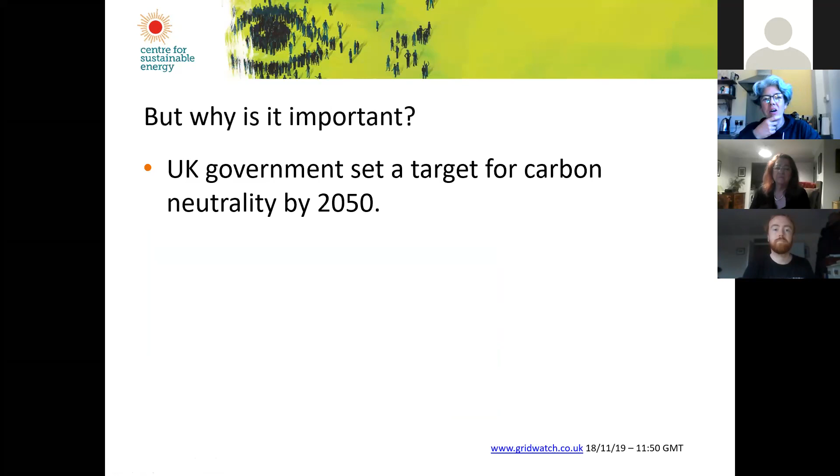Next slide, please. So we've got a target for carbon neutrality by 2050. That's a good target, whether we get there, don't know. But in order to achieve that, we do need to move all our heat demand to be carbon-free or electric. And I think the only way we're going to do that is by moving to renewables.

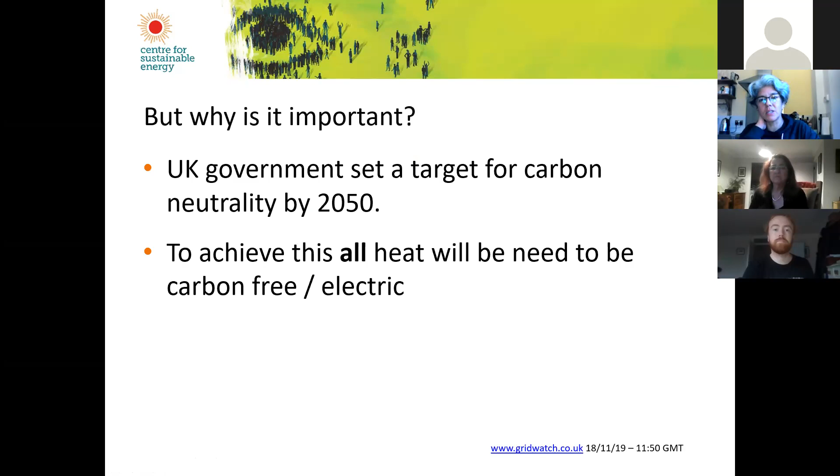Next slide. So this was taken back in August. It's from a lovely website called GridWatch. If you can't see it, I'm sorry, but it might be worth having a look on the website afterwards. It updates itself every 10 to 15 minutes, and you can see what percentage of the country's energy is being produced by different sources - solar, nuclear, coal, gas, that's the CCGT. It's a really interesting website to look at. On that day, something around 15 gigawatts was gas, about 2 gigawatts biomass, nuclear was 5 gigawatts. I can't read all of it here, but the demand was about 30 gigawatts, I think - it's very small for me to read. But it's a good place to see what our demand is. And if you look down the middle row at the beginning, there's wind and solar, and actually they were a rather small amount being produced that day.

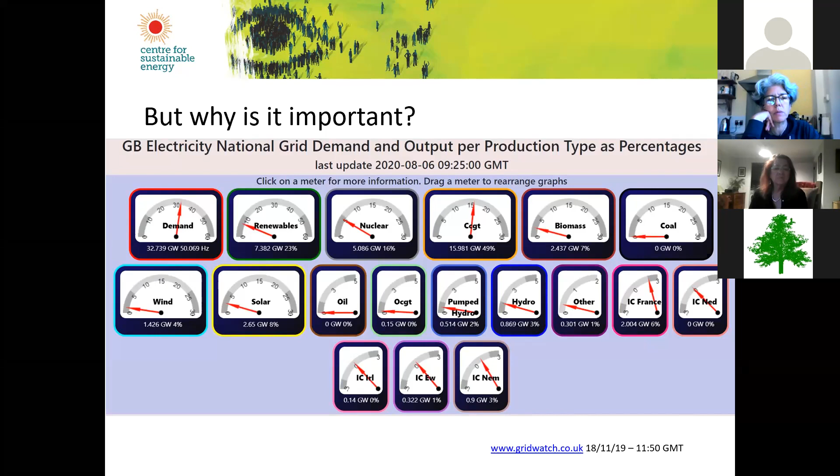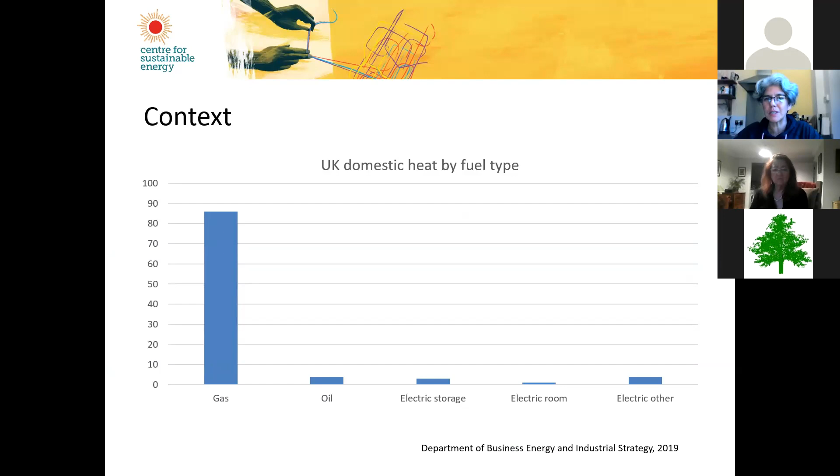Next slide. And this is important because nearly 90% of houses in the UK are heated by gas. So if we want to go electric, we've got to get pretty much 90% of people off of gas and heating their homes through electric. As you can see, probably less than 10% of homes in the UK are heated with electric at the moment, so it's quite a big task. But we did go from pretty much coal to gas during the course of the 50s, 60s, 70s, so it is possible if we want to.

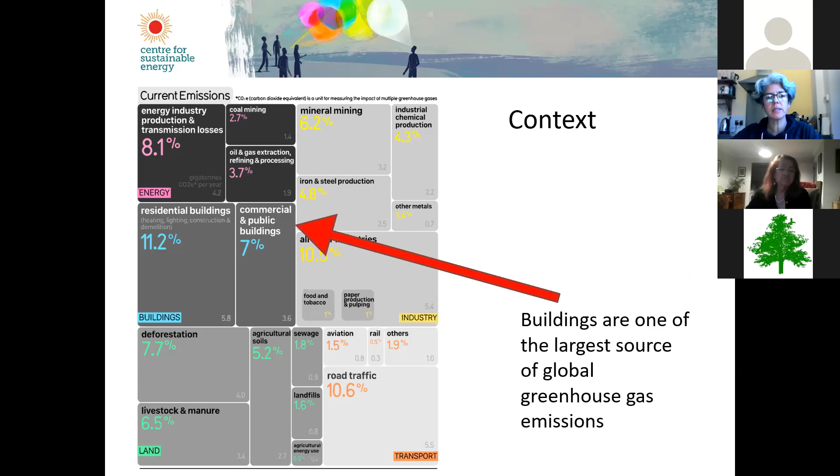Next slide, please. This is a nice little illustration from Europe, so it's not 100% accurate, but it's not far off. 64% of energy consumed in a household is for heating - it's slightly more in the UK, around 65 to 67%. Then 14.8% is water heating, normally averaging around 20 to 25% in the UK. The rest is cooking, lighting and other appliances. So at the moment, because most of us heat our water with gas and heat our homes with gas, the electrical load is actually very low. So if we're going to transfer all of that heat load onto electric, we've got quite a mammoth task, if you look at your individual home and then across the number of homes in the UK.

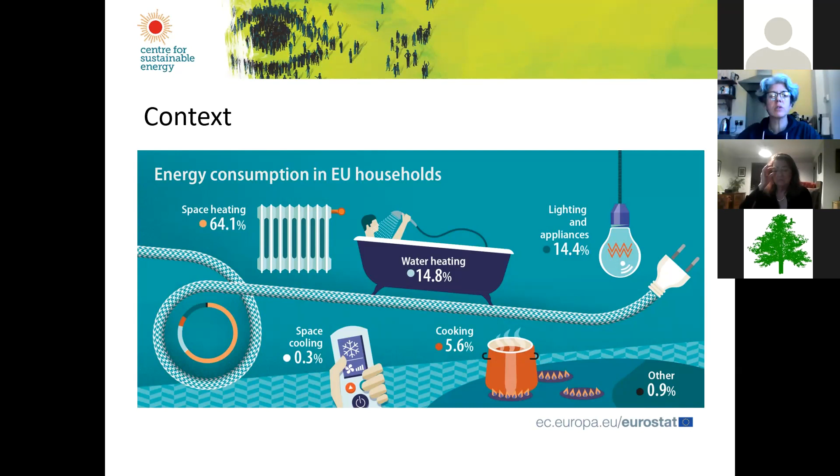Next slide, please. So if we go to retrofit - most people want to reduce their energy bills, we don't like paying through the nose for our energy, anybody. We don't actually like living in cold homes, although I suspect a lot of people have fairly cold homes - I know I do, I wouldn't mind a warmer home. And 17% of the people asked in this particular survey, I think it was a BEIS survey, ranked it as most important.

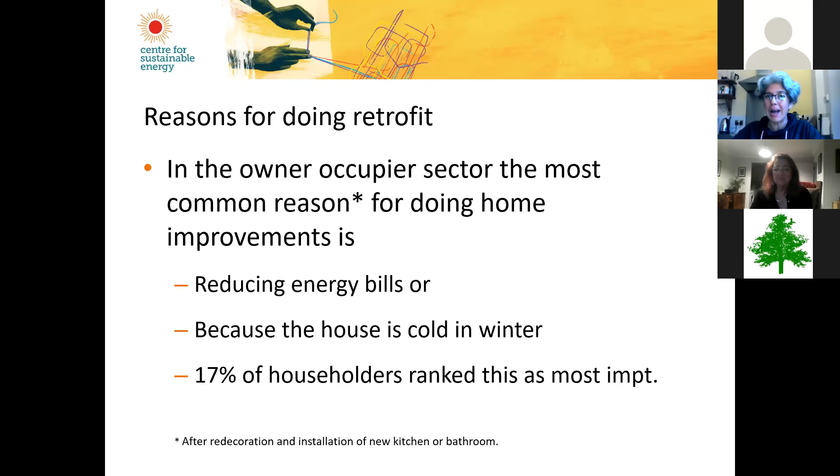But that was only after people had redecorated their house, put a new kitchen and bathroom in. So it is something people want to do, but we'd like to have a nice home, a nice kitchen and bathroom, before we worry about how energy efficient it is. So we kind of do things the wrong way around.

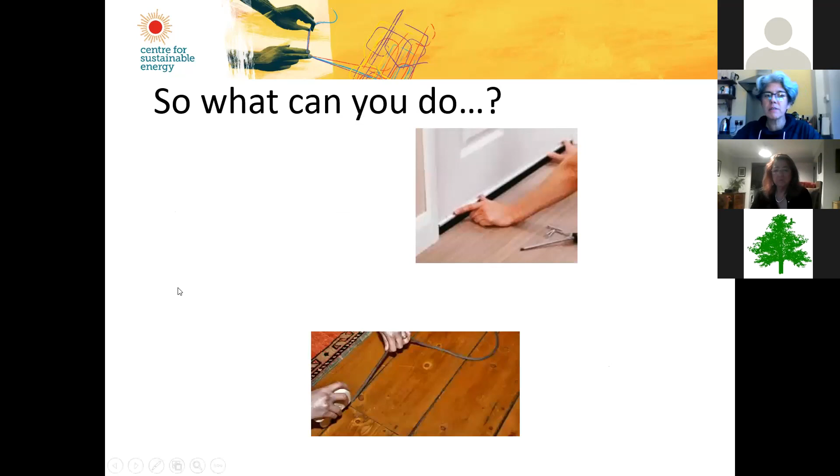So I was asked about what you can do, and this is literally a slide of different pictures of what we can do. So this is draught proofing, simple draught proofing, things like in between your wooden floorboards. I've done it in my home and it's made a massive difference. Internal wall insulation, external wall insulation, much bigger jobs.

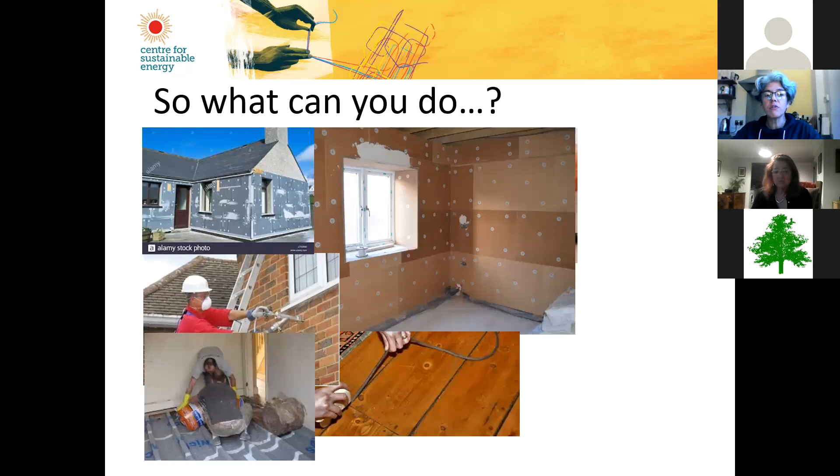And that's cavity wall insulation being installed. And again, this is underfloor insulation being put in on a raised timber floor. Loft insulation, double, triple glazing.

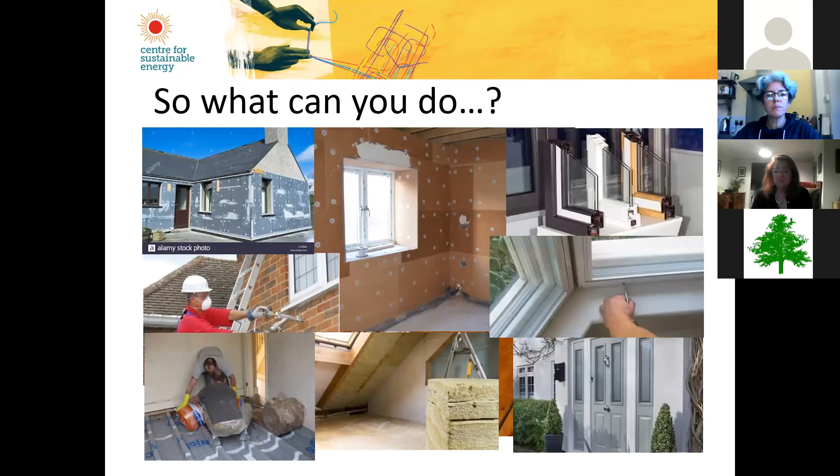This is secondary glazing, composite and very high energy doors. Are there any more? Yes, solar PV, solar thermal, heat pumps. That's an MVHR unit, that's a ventilation unit. Are there any more? Ventilation, yeah.

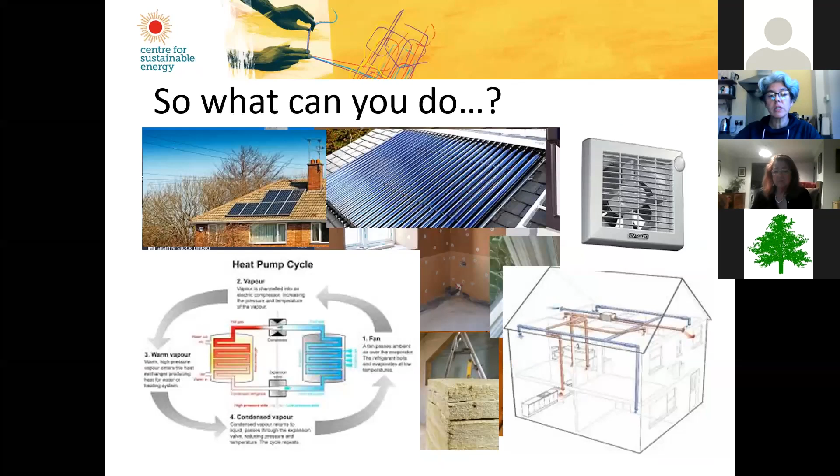Just going through the process, I actually started that slide with looking at the cheapest, easiest measures you can do in your home, building up to some of the more expensive. Now, I wouldn't suggest you put an MVHR unit in last—if you're going to do a retrofit, you probably need to put it in earlier in the process. But you can start with some really simple things that can be really effective, and then, of course, you can start spending a lot of money.

It can be shutting the curtains in the winter when it gets dark, which helps keep the cold outside and the heat in, and helps with convection currents. Nobody really explains the reasons behind that—it just says shut your curtains—but having thick curtains and doing that in winter can really make a difference. It's also about shutting doors when you're in the kitchen and you don't want that hot air going around different parts of the house and potentially causing condensation problems.

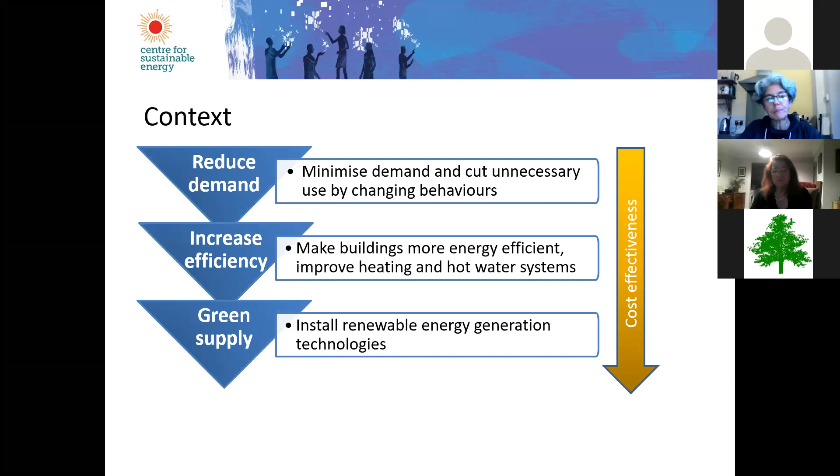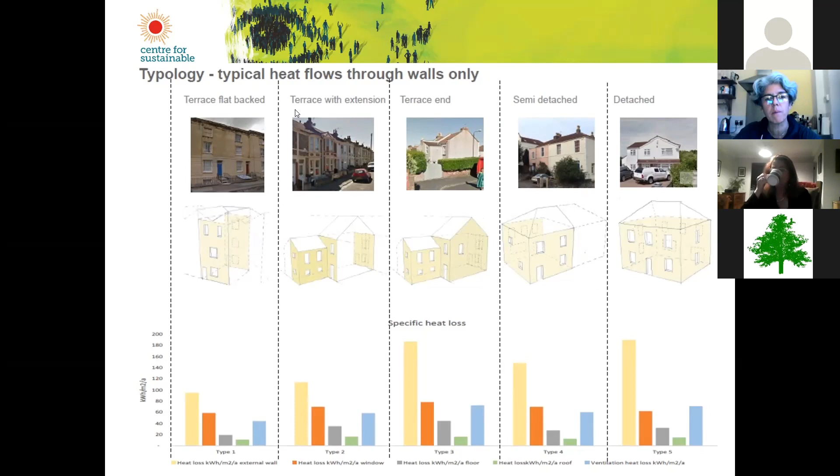So I was asked to talk a little bit about Future-Proof - that's the title I've got tonight. It's a project I've been running for the last 18 months, run by the Centre for Sustainable Energy in conjunction with our partners, the Green Register. It's funded by the Department of Business, Energy and Industrial Strategy, and it's a pilot looking at how we can grow the supply chain - to you and I, that's builders and people that do work on our homes.

So we've got a sort of twin-facing project. We're running an advice side for people that want to understand how they can make their homes more energy efficient and get some tailored advice. And we're also working with builders to try and get them to do more training and understand the principles of whole house retrofit and some basic building principles, so they can understand better how to do the role that they're doing. Next slide, please.

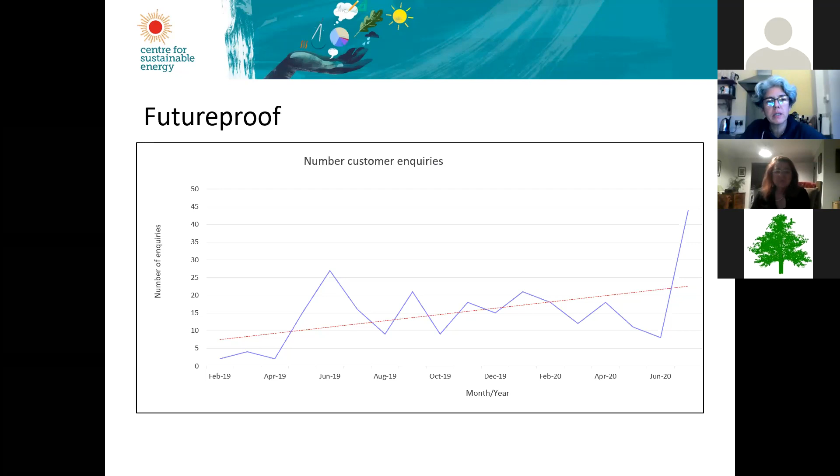So next slide, please. As I said, the other side of the work we do is working with what BEIS likes to call the RMI sector, which is the repair, maintenance and improvement sector - again, builders. And we have a bit of an issue with builders in the sector, because most of the builders that will work on your home don't realise that they are potentially at the front of the energy retrofit revolution.

So the guy that comes around to fit your kitchen, he probably is not going to try and sell you insulation and improvements while he's doing the works. Likewise for the person that's going to do your bathroom, or maybe the decorator, all of that stuff. So within the industry, we have suppliers of certain products like heat pumps, solar PV, glazing, doors, that sort of thing. And when you want to do that on your own and just do it as an improvement, that can work.

But if you really want to improve your house further and reduce the carbon emissions, you really need to start looking at that kind of whole house approach and how you can really make an impact.

When you want to do an extension or a loft extension, what happens is you come across a lot of builders that don't really know how to do that for you. There's a very small niche market of builders that operate in this particular arena, and we've been working with them to develop some training, trying to expand the number of builders we're working with. You've got all the skills because you're a builder and know what you're doing, but you don't really understand the building physics stuff. If we can teach you this, and the importance of making sure you don't get thermal bridges, you've got good air tightness, and you know about ventilation, then you're not going to have any problems on the job.

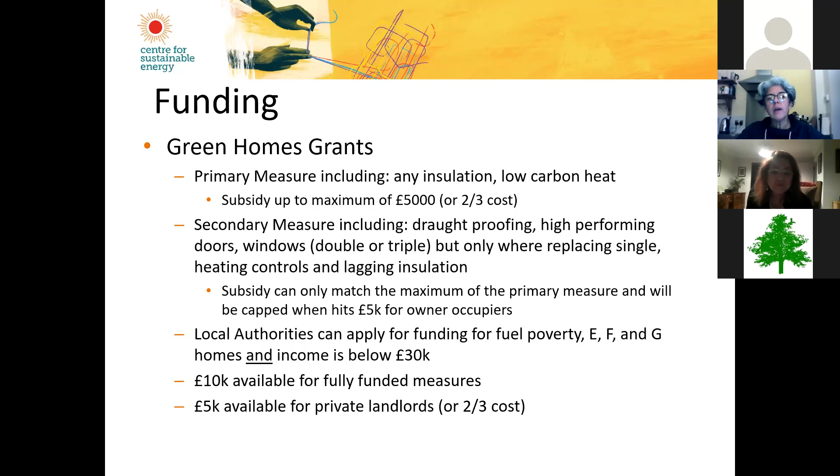But everything needs to be fully funded for the £10,000. You can't give money towards that. So if you did know somebody you thought might qualify for it, and they wanted a heat pump, that £10,000 would need to pay for the whole of the heat pump. They can't invest any of their own money in it.

Private landlords can apply for up to £5,000 to help them through the process, though I think it may only be available on 1 or 2 properties. So if you're a private landlord with multiple properties, you can't keep going through and getting those grants, I'm afraid.

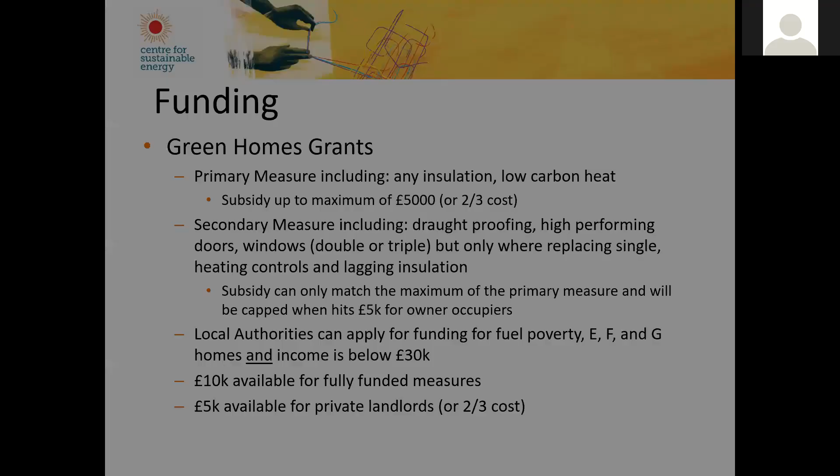Alongside that, there's the renewable heat incentive. You can actually use the Green Homes grants alongside the renewable heat incentive. So if you wanted a heat pump or a solar thermal unit put in, you could use up to that £5,000 for your upfront capital cost to purchase the equipment. That money would be taken off the renewable heat payments you'd normally get over the next 7 years - I don't know if they spread that over the 7 years, or you get sort of 2.5 years of payments because you've had £5,000 up front. But it can be a really good way to get that heat pump, particularly if you haven't got £5,000 to £10,000 sitting around ready to invest. If you can get £5,000 from the government, then maybe that can help.

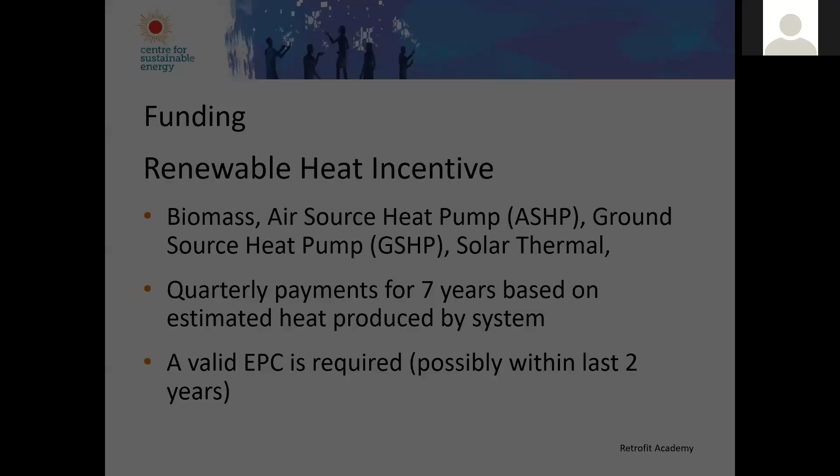I think that might be it - that's pretty much it, a bit of a whirlwind through what we offer here. If you do have any questions, pop them in the chat box, and hopefully we can answer them in the Q&A session later.

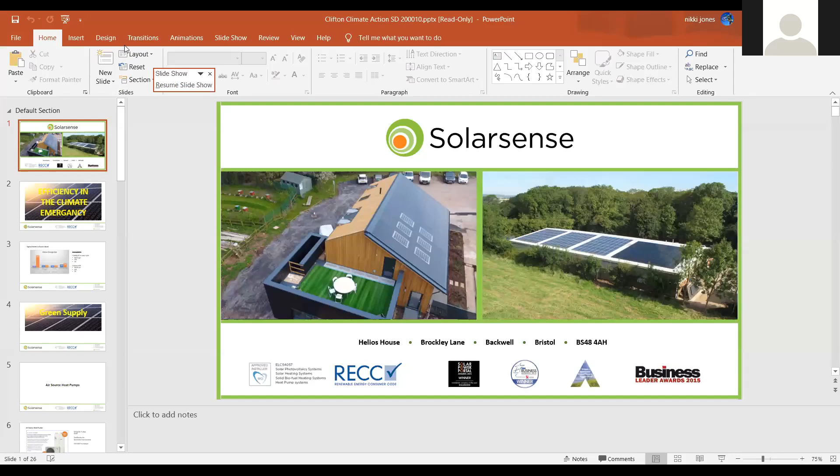Are you muted? Yes, you are - ask to unmute. Fingers crossed. Let me get your slides up while we're doing that. So those are yours, and do it like that. Okay, is that the wrong person? Oh, have we lost Simon? No, I'm still here, there he goes. Ooh, he scared me there.

As Kate has already pointed out in her presentation, the steps to energy efficiency are threefold. First of all, you need to reduce demand, then you need to increase efficiency, and then finally, you need to green your supply, move to a green supply of energy.

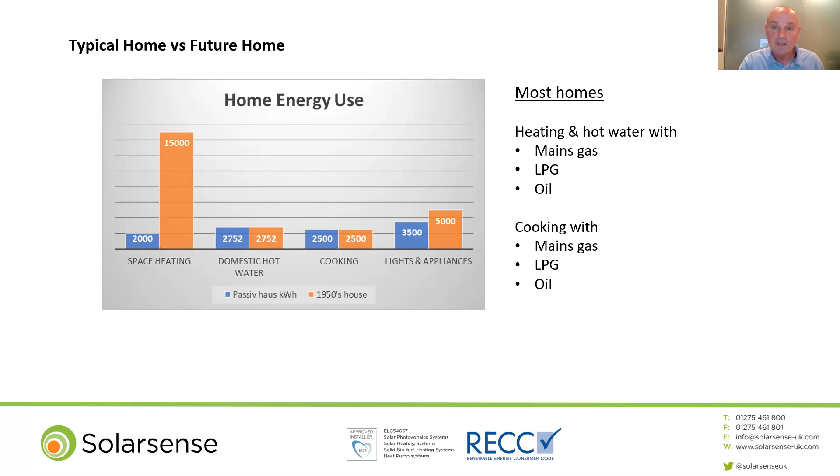Okay, thanks, Dorian.

Let's move straight on to looking at the various different green supplies. First of all, there's air source heat pumps, which is likely to be the most common alternative to gas and oil boilers.

Currently, they attract a Green Homes grant and a renewable heat incentive. As I'm sure you're aware, from 2025 oil and gas boilers will no longer be allowed to be installed or used as replacements. So fairly shortly, oil and gas boilers will be redundant technology. This is the future we're looking at: air source heat pumps.

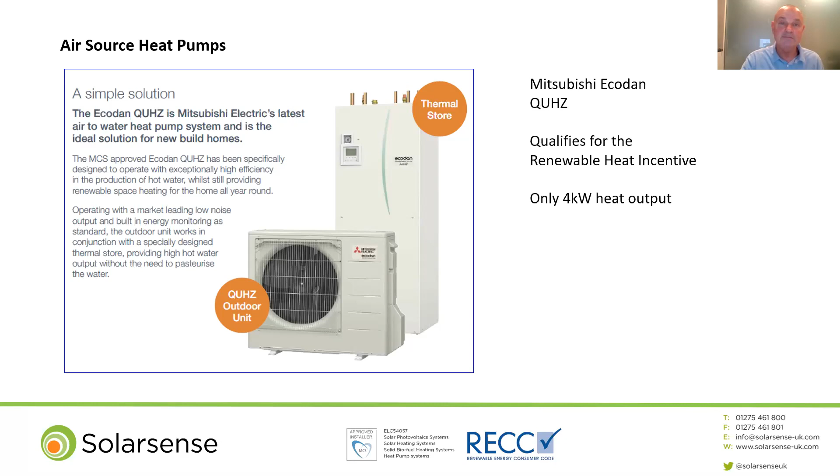So how do they work? An air source heat pump can supply heating and domestic hot water from a renewable source, so you both reduce bills and reduce CO2 output. They consist of a heat pump, which sits outside your house, and a hot water cylinder that helps to store the energy created, which sits inside your house.

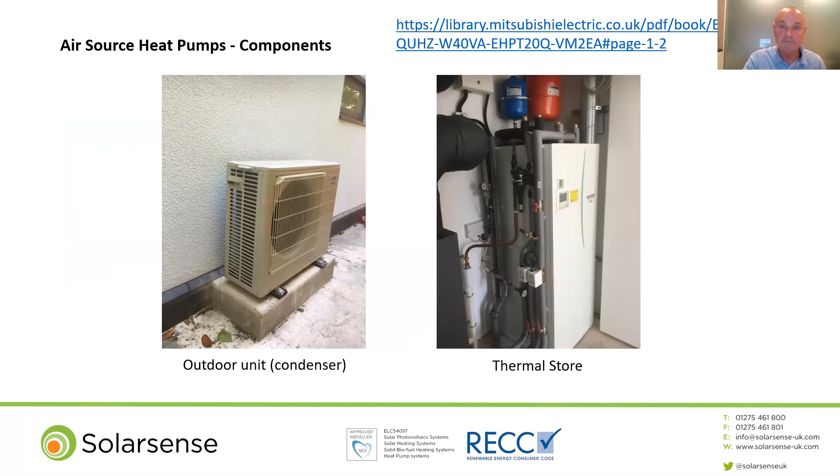What the air source heat pump does, sitting outside, is harvest heat energy from the air and convert it to a higher temperature using the same technology you have in an air conditioning unit or a fridge, but in reverse.

It's connected to electricity and water, and that's all. It's clean, quiet, and really efficient. That's one of the keys to renewable energy.

It's much more efficient. For every kilowatt of energy it uses to create energy, it creates 3 kilowatts of heat, so it's actually 300% efficient. Oil and gas, by comparison, are at best sort of 85 to 90% efficient. So for every kilowatt of oil or gas energy you use, you get less than 1 kilowatt of heat energy produced.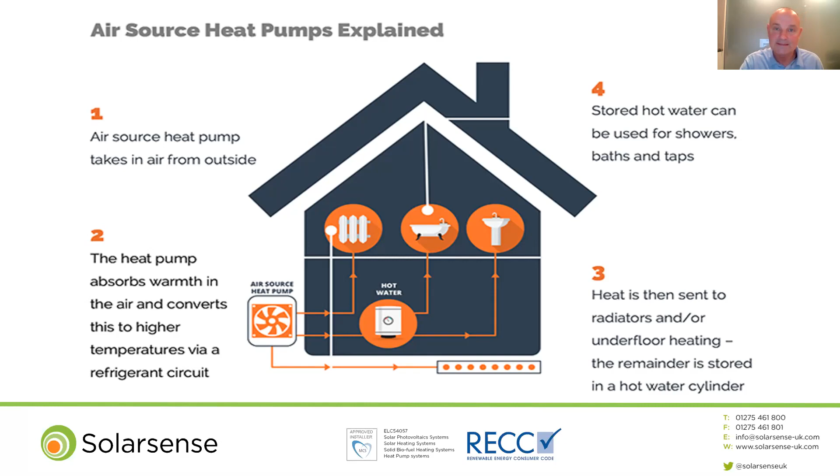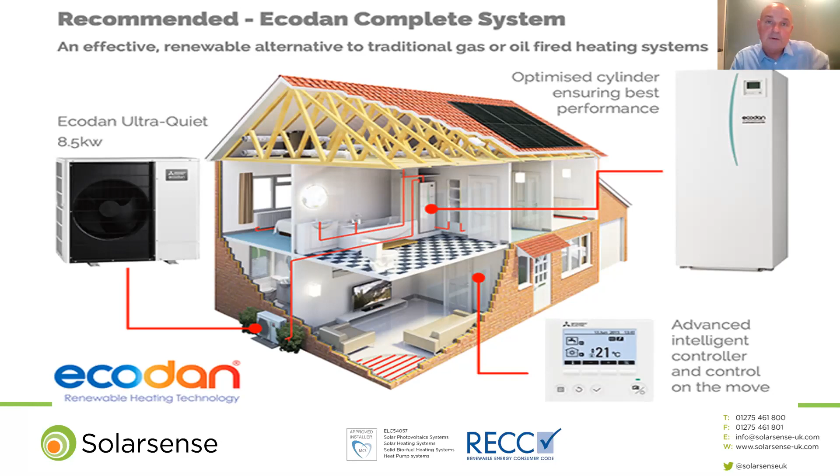So this is a typical layout in a home. You have the air source heat pump on the outside of the house, feeding radiators and the water cylinder, which sits inside the house. The next slide shows how the water circulates around your home.

You can see the air source heat pump sitting outside your house on the left there, and the red line is the hot water coming out of it. Some of it goes up into the thermal store, the water tank, and some of it goes down into your radiators. The water in your tank passes through a heat exchanger and then heats your hot water as required, domestic hot water, and then it returns back through the loop to the air source heat pump and gets reheated again.

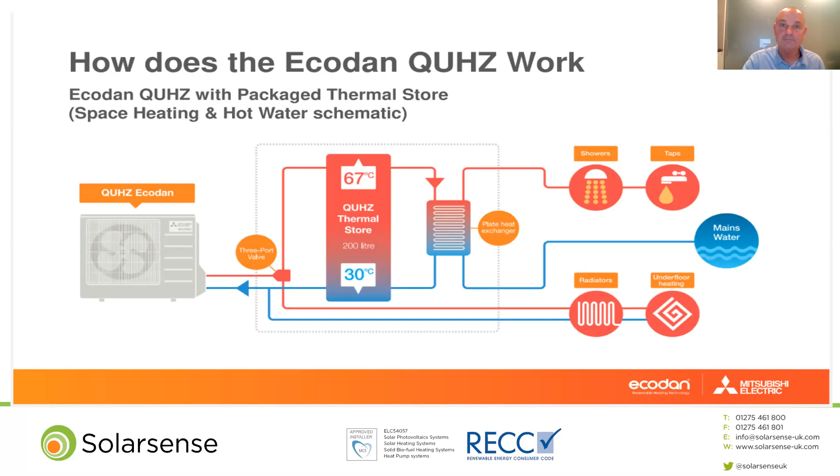So that was air source heat pumps. Just to recap, air source heat pumps can do domestic hot water and heating all year round without any problem. They basically just replace your boiler and take on all the duties your existing boiler takes on. Now we're going to look at solar thermal.

This also currently attracts a Green Homes grant and the Renewable Heat Incentive, the RHI. Solar thermal has been around for about 25 years, and it uses the sun to produce heat for hot water only, so it doesn't heat your home. All it will do is produce hot water for you.

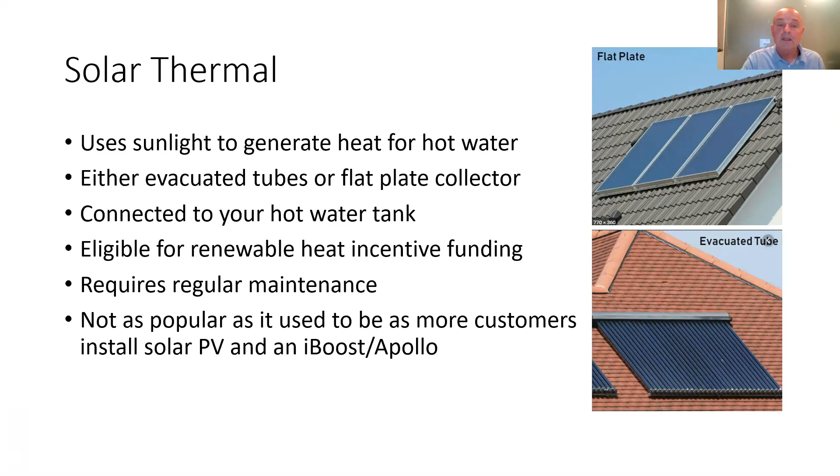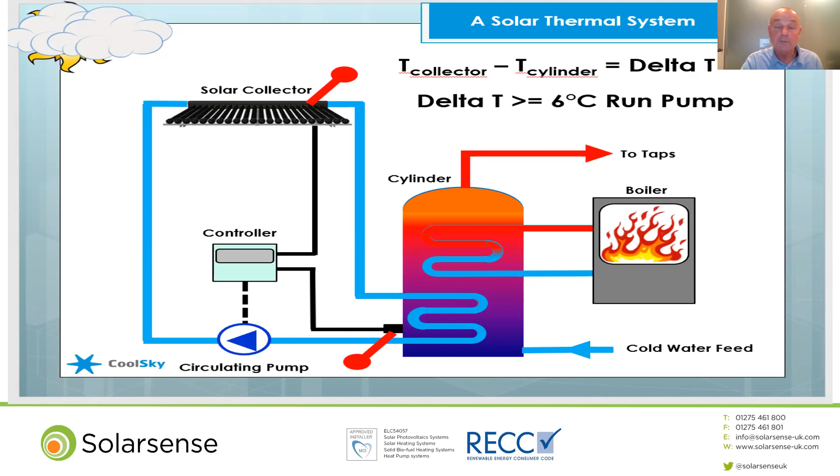The next slide will show you how it works. You have the solar collectors on the top left. The heat they collect is used to heat a cylinder, again with coils in a cylinder, and that will be used to heat your hot water. But as you'll also see here, you still need a boiler for your central heating, and also potentially to give you some hot water in winter as well.

So as I was saying before, a lot of what we're going to get from a modern house, or a renewable energy powered house, will be driven by electricity. You'll be using a lot less energy, and it will be a lot less expensive than if you had been using oil and gas. But even so, it will increase your electricity demand.

Really, as part of the whole renewable energy piece, although this isn't necessarily about heating, we also want to think about solar panels. Solar panels have been around for 20 years, so the technology is fairly well optimized now. What solar panels do is produce electricity from the sun to power your home and your renewable heating.

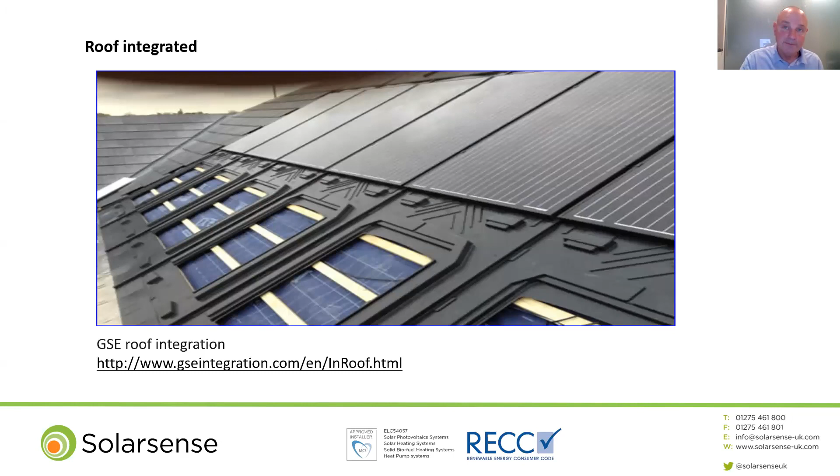Okay, so just quickly to explain how solar panels work. You have solar cells in your solar panels on your roof. They convert light into electricity. That's a direct current, so that comes down from the solar panels and is converted in the inverter to alternating current. Alternating current is what we use in our homes. So that will go from the inverter down through a generation meter, so you know how much your panels are generating, and then into the consumer unit.

Now, from the consumer unit, either it will move into your house if you have demand in your house. Alternatively, it might be stored in a battery. If you are producing more than you can use, then it will get exported back to the national grid.

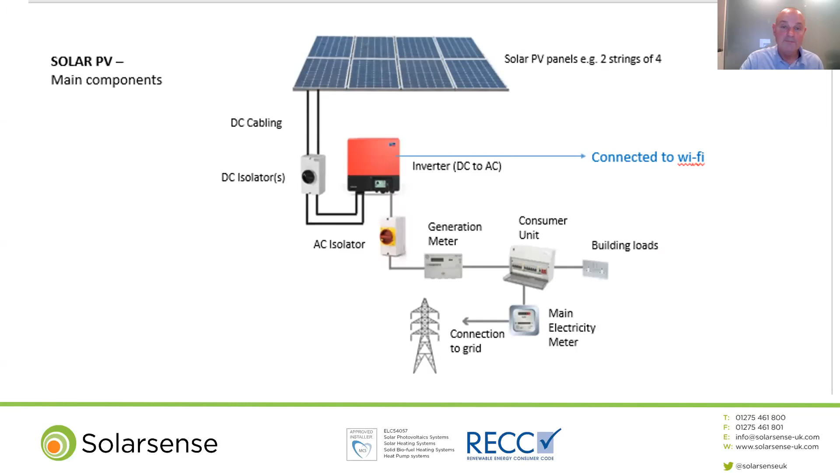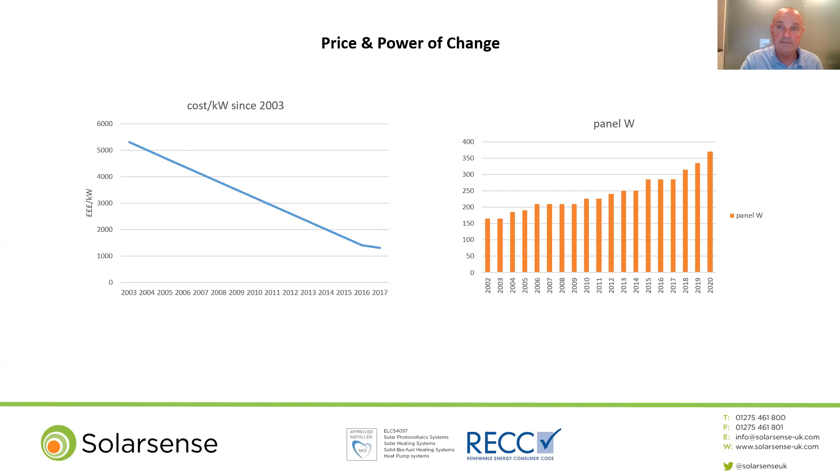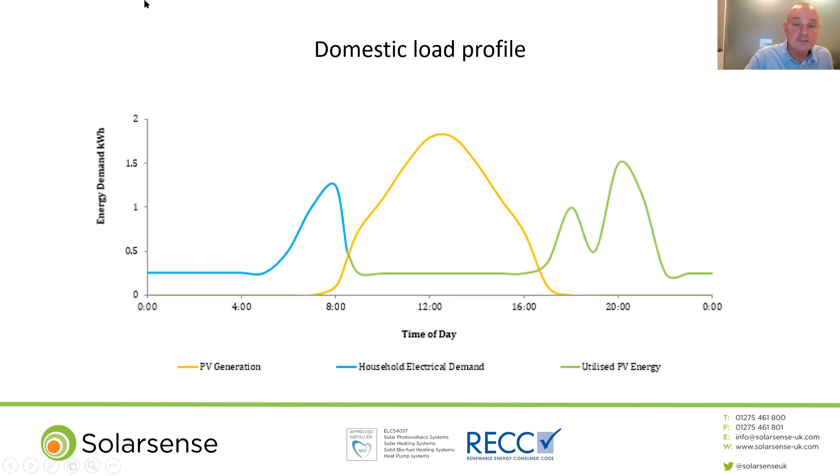With a battery, you can store the generation you make during the day. So your panels will be generating electricity during the day whilst the sun is out, and that electricity can be stored in a battery and used when you need it.

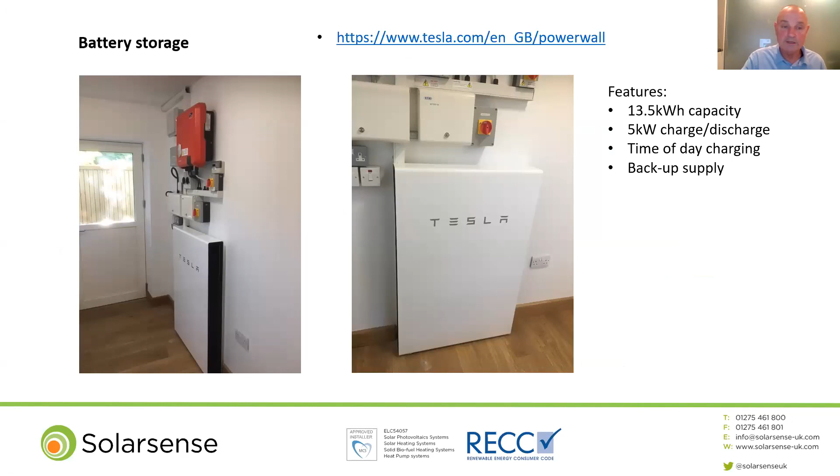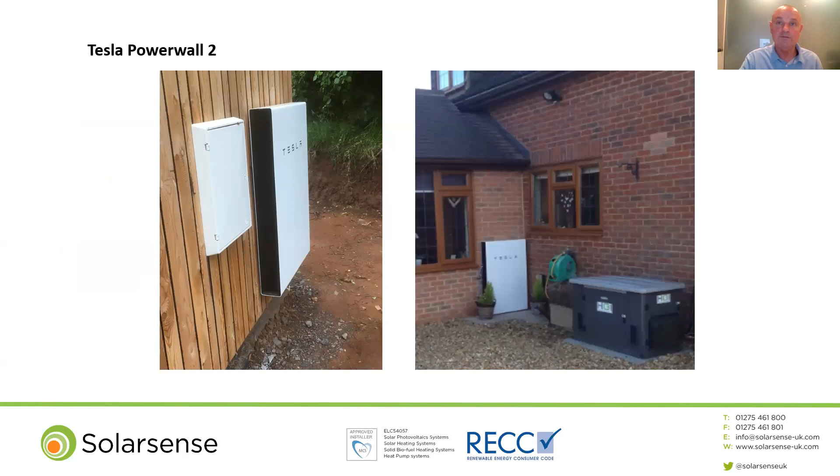So that's a typical installation of a Tesla Powerwall battery indoors, but also, as you can see, if you're tight for space, you can also store them outdoors as well. Okay, so that is a quick run through on how we can green our energy supply. Thank you.